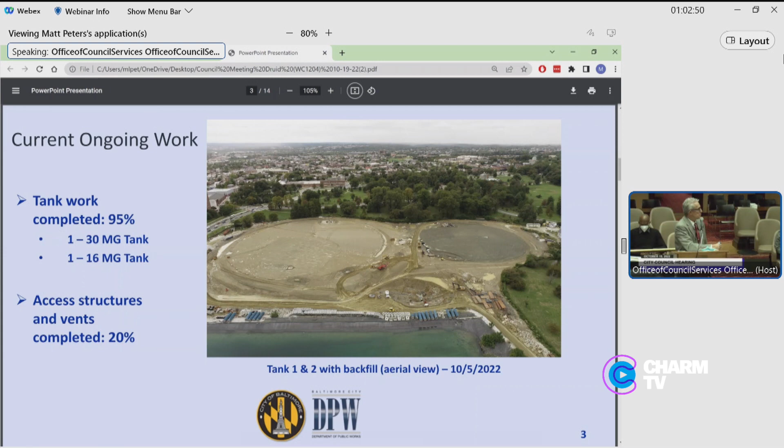Some ongoing work. Again, there's still some pipe work that's going on, which is about 85% done. There's about 6,000 feet of pipeline work, and we're well ahead on that work as well. As you recall, recently we ran into some rock issues and we presented a blasting plan and it was rolled out to the community, and that went well, successful, and we're moving ahead with the pipeline construction. That blasting actually saved us probably a year of time because of the hard rock we encountered. Next.

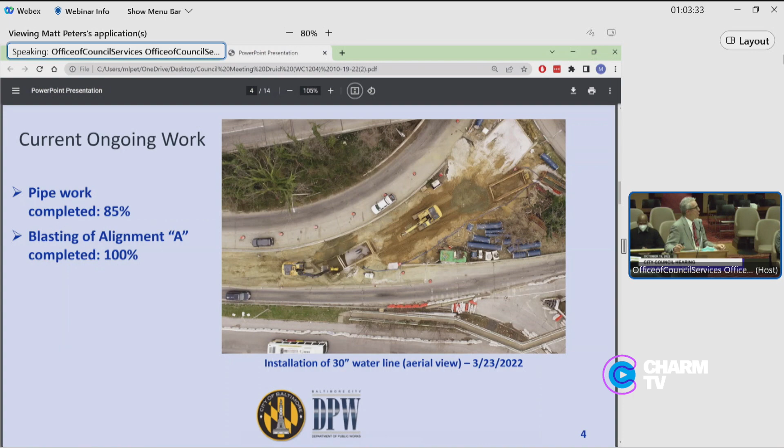And for this picture, you can see on the right, that area right there is what we're referring to as alignment A, where we hit the hard rock. It was about 400 linear feet that we had to work with on the rock, and the blasting was contained to that area, and there were really no impacts resulting from the blasting itself. The work involves installing the large pipeline. You've got to weld the pipe together, a steel pipe, and then also some additional auxiliary pipes, and maintaining erosion and sediment control as well for compliance. Next.

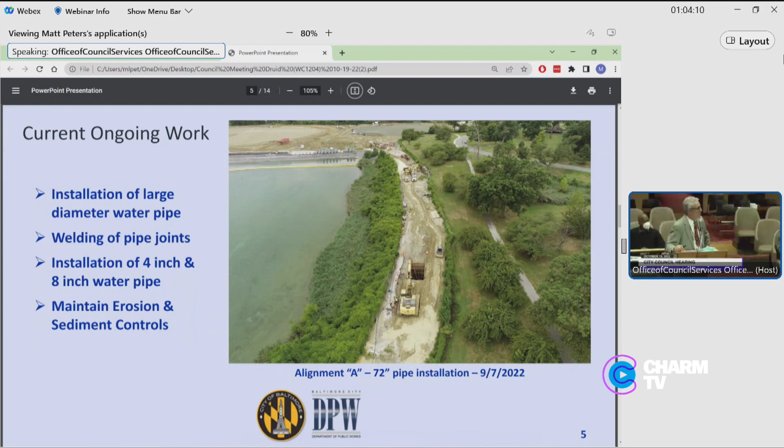So some of the upcoming work at the project: we still have some electrical work to do, instrumentation and control to control levels in the tank and the system, and interact with all our pumping stations and our treatment plants. We continually test pipe once it's installed to make sure the integrity of the pipe is sound.

There's going to be an aeration system installed in the lake itself. Then there'll be tie-ins. We'll reestablish the Jones Falls Trail, and then the restoration and full opening of the Druid Park Lake Drive is estimated the end of this year, December, and we're coordinating with DOT on that reopening.

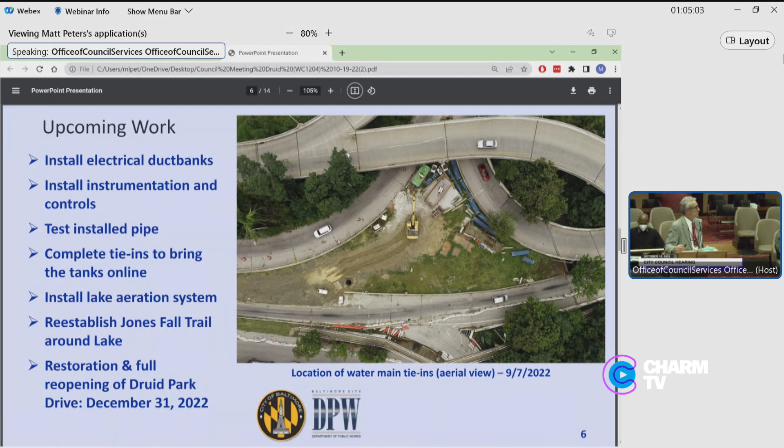Okay, and just wanted to mention briefly, the city's always investing in infrastructure based on a lot of parameters. We look at condition, criticality, equity, and we try to spread investments throughout the city of Baltimore. And some of the investments in this area of the city around Ashburton, there's a couple projects that are ongoing.

There's one, the 1257 water main replacement project just across 83 to the east. It's basically a water main replacement, started in April, expected to finish in September of '24. And then the Vernon Pump Station, which is actually on the east side of 83. We're basically finishing up design. It's planned for construction in the near future. So just wanted to mention the other investments in our infrastructure, specifically in this area.

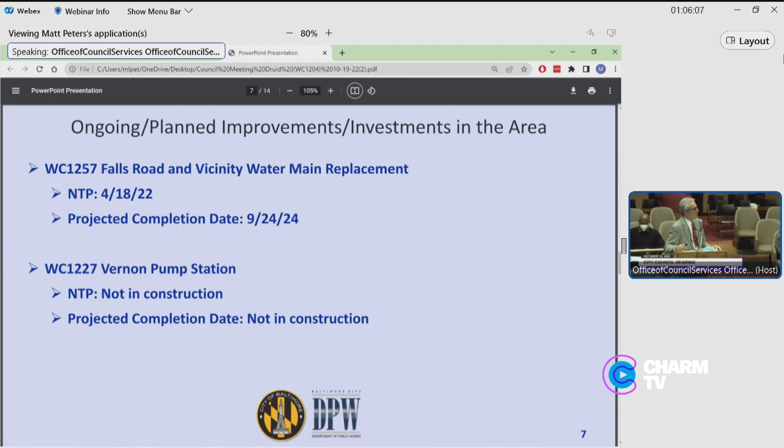And then again, as mentioned earlier, the councilman mentioned investment in this particular park. It's a large park, a lot of activities, and there's a lot of amenities that are going to follow on this park. As you can see here, it's a long list, and I have some slides to show what's proposed, but we're actually reestablishing the shoreline to preserve the aesthetics of the lake. There's going to be an open welcoming area. Actually, the covered tanks will add 14 acres of open space for the park.

And new site lighting, paths around the park for pedestrians and cyclists. Widen some of the Druid Park Lake Drive. There will be a podium for a future band shell, coordinating with Rec and Parks. And we've been coordinating with Rec and Parks continuously, even through construction, on some stormwater features and things of that nature.

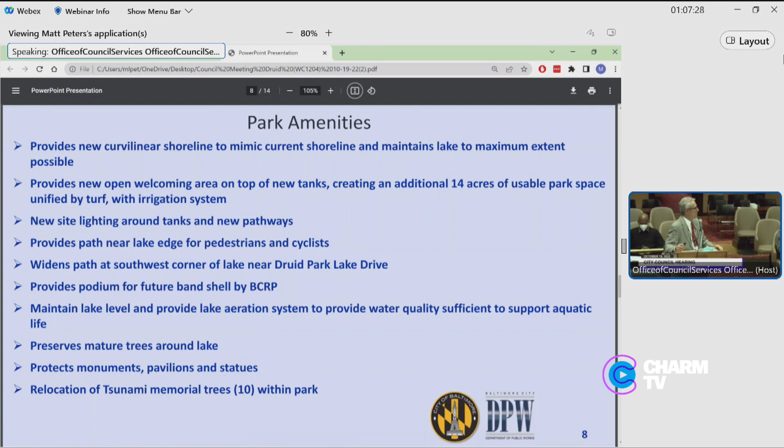Again, the lake's water level will be maintained, basically with stormwater and supplemental water supply. We're going to preserve the trees and monuments as well. Next, please. So, again, I just wanted to give a bit of an overview. This is what the finished product's going to look like. You can see here that the tanks will be covered, and there'll be open space for activities, utilized for multiple events. Next.

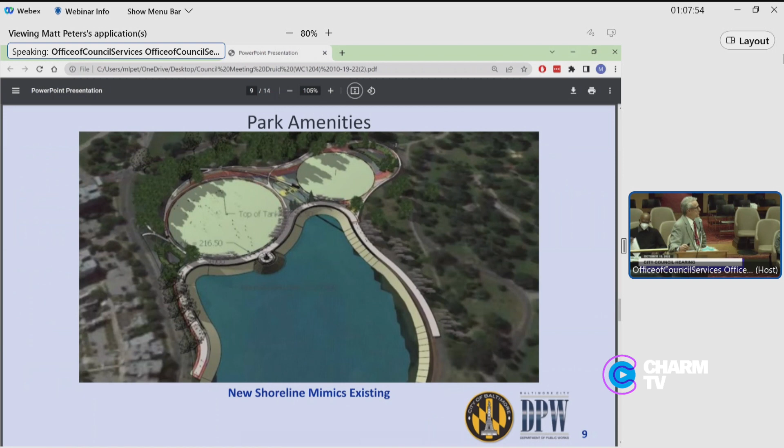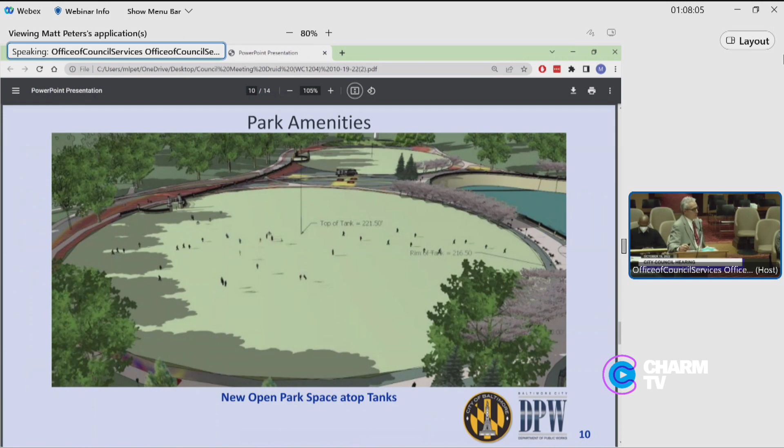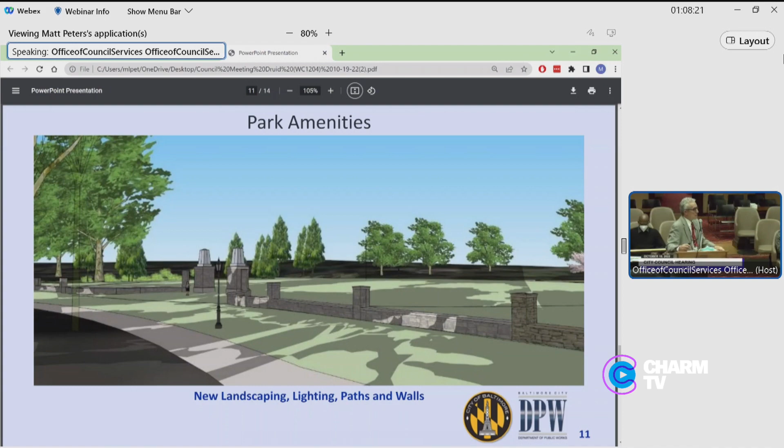Again, a little closer shot to give you a sense of the magnitude of the open space, and you can see some of the paths around to the right. There'll be more of an entrance on the left side of the park. Next, please. And this is the park entrance area, to give a gateway into the park, memorialized with stone walls, sidewalks, paths, and lighting. Next.

And again, coordination with Rec and Parks and the vision for the park. We're constantly coordinating and making sure that we're working with Rec and Parks on key features, be it the pavilion, amphitheater, trails. As I mentioned before, we're coordinating right now on some stormwater that Rec and Parks is proposing in their next phase. Our work is not impacting the existing park. And like I said, we're coordinating with Rec and Parks facilities. Next.

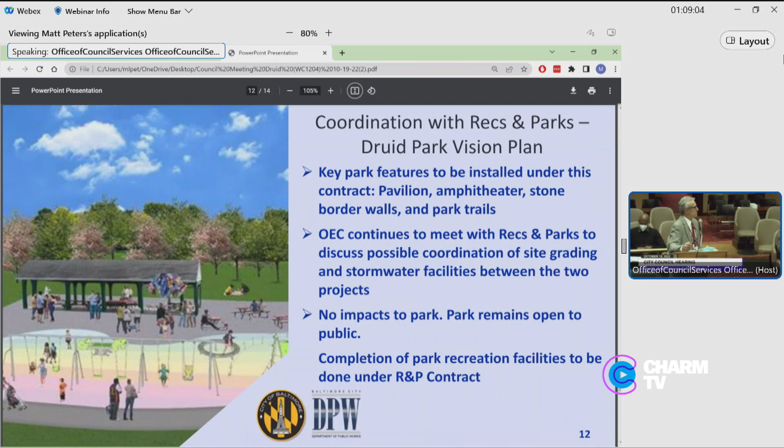I just wanted to touch briefly on some environmental concerns that we came across during the construction of the project. Initially, back in 2017, as you're aware, the tanks are actually sitting in a portion of the footprint of the lake, so we had to isolate that portion. When the contractor started, they put in a turbidity curtain in 2017, and then they would build a cofferdam to separate the active potable water lake from the area where the tanks were to go.

There were significant efforts to maintain proper construction with the turbidity curtain. We had some issues with that. We worked with MDE, and there were multiple attempts to get the turbidity curtain up to standard to meet water quality for the water system, and that was not successful. So basically what we did is we took the lake offline, drained it, installed the cofferdam, and then we were able to continue on with the construction.

We continuously coordinated with MDE to ensure we're in compliance with water quality regulations. As far as water quality testing in the lake, the contractor was testing daily chlorine, turbidity, temperature, pH, and weekly E. coli. So we're ensuring the water quality of the lake is maintained for the citizens of Baltimore. Next.

The Druid Lake Vision Plan was something that we began in the year 2020. We finally published our report in November of 2021. I have it here in front of me. This is a 115-page document that covers a lot of material. So to get to that point, we had to first step back and look at the history. Druid Hill Park is the third oldest park in our nation. And I don't think any of us should take lightly the importance and the significance of this property.

The history within the city comes from the terminology of the druids and the trees in the park. We saw in the early 40s and 50s a lot of use from the surrounding neighborhoods and communities that were primarily African American and Jewish neighborhoods. Then in the 1960s, we saw these neighborhoods unjustly cut off from the park with the Jones Falls Expressway and Druid Park Lake Drive. These are some issues that we really see as important in tackling and addressing.

Looking at a greater context of our project, of course, this is building upon the DPW tank project, which I think he showed at $134 million. We envision the lake project, the recreational lake opportunity, in the $50 to $60 million range, and then opportunities to address those issues with Druid Park Lake Drive on top of that.

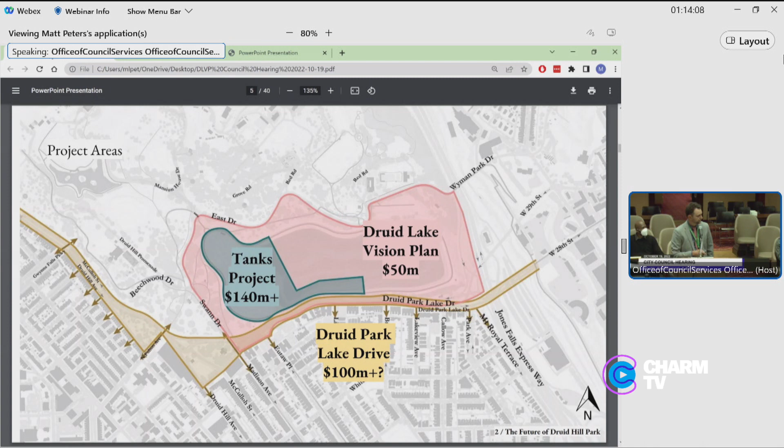In terms of working with our colleagues, I think this project, more than any other one that I've been involved with, has really broken down the silos. Working closely with DPW, DOT, and the Department of Planning, we've really come together to create a lot of energy, not only around this project, but others in the vicinity. Of course, we have great proximity to the West Impact Investment Area and all the other development that's happening in this region, so that our project can potentially be a really transformative effort that can build upon all those efforts and make a really successful project.

So as part of this effort, we've really been thoughtful in our engagement. We've had 3 community engagement meetings hosted virtually. We had 1 in person. We've had numerous interagency and director level meetings, meeting with the state as well. Through all this, we've engaged with over 600 residents, not only directly around the park, but throughout the city. We see this as not only a local, but also a regional destination. Of course, people come here not only to bike and walk around the park, but to use various amenities, to attend concerts and different things that are held throughout the year.

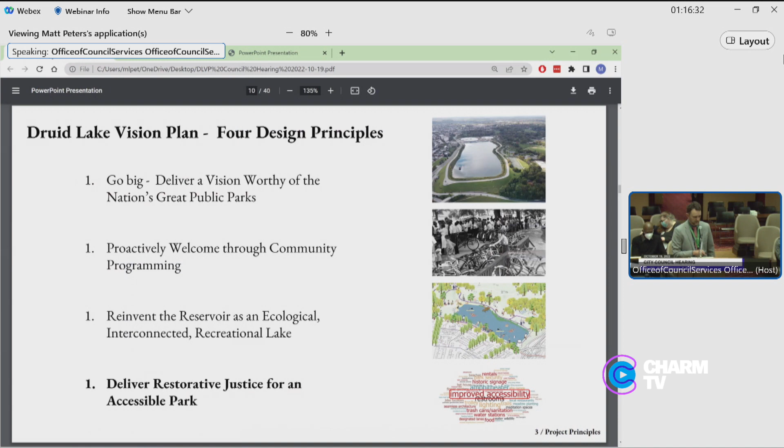So through that, we've had a lot of community engagement, as I mentioned. We're looking at ways to address the ecology, and then last but not least, address some of those racial injustices that were part of the Druid Park Lake Drive and the JFX that cut off our surrounding neighbors.

So here's a quick shot at the vision plan. This is still a work in progress. We're currently in our schematic design phase. We're continuing to roll. We intend to come back to the community sometime in early 2023 and show our progress.

By this point, we've taken this vision, and now we're getting into the nitty-gritty engineering of it to see what our limitations are, what can and cannot be done with regards to the dam, how we make sure that we respect the work that DPW has done while building upon our opportunities to get people down to the lake and all around it.

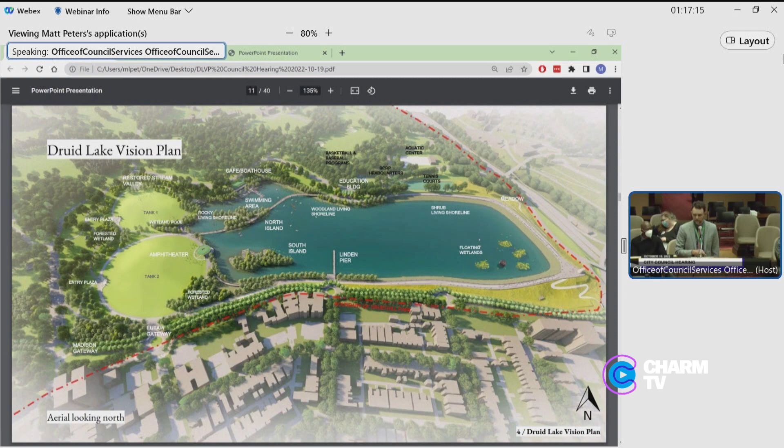So I'll give you a couple shots. This is a picture today looking northwest. And then this corner is where we envision an opportunity for a boathouse and a cafe overlooking the water. We can potentially have some islands and a pedestrian bridge and really get people not only in, around, but over top the water and experiencing the lake in ways that they previously did not have access to.

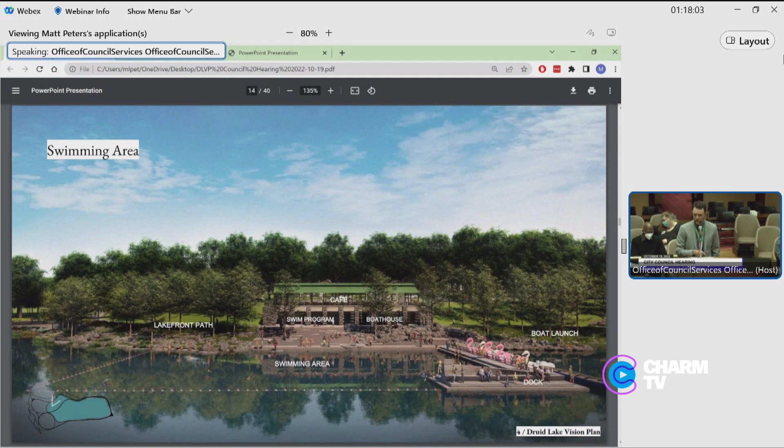There's another shot at that potential boathouse. Again, this is very conceptual and it'll be fleshed out going forward. But I mentioned the idea of a cafe. Maybe it's an opportunity for vendor stalls, a place where local businesses can come in and set up shop and serve the people. We don't really have this in our parks at this point, but this is an opportunity to get people to come to the park and spend an entire day there.

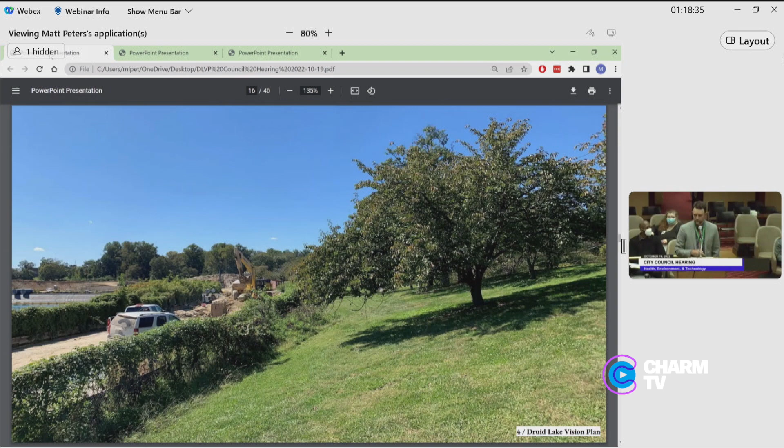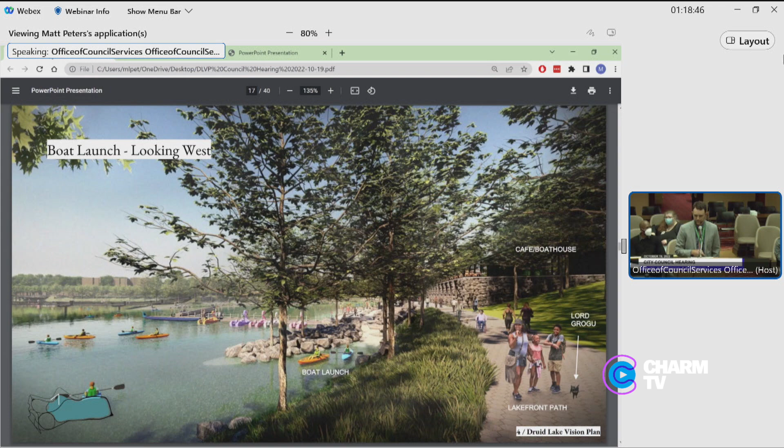Another existing view. And again, you can see the boat launch here, getting people down to the water. This will be an early phase plan of ours, really creating that access.

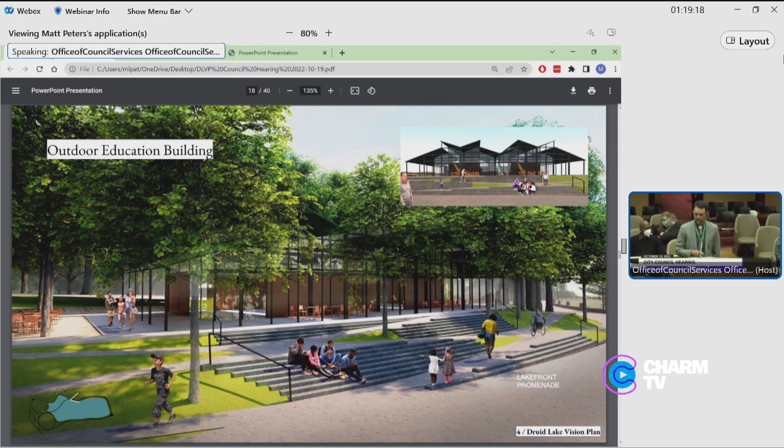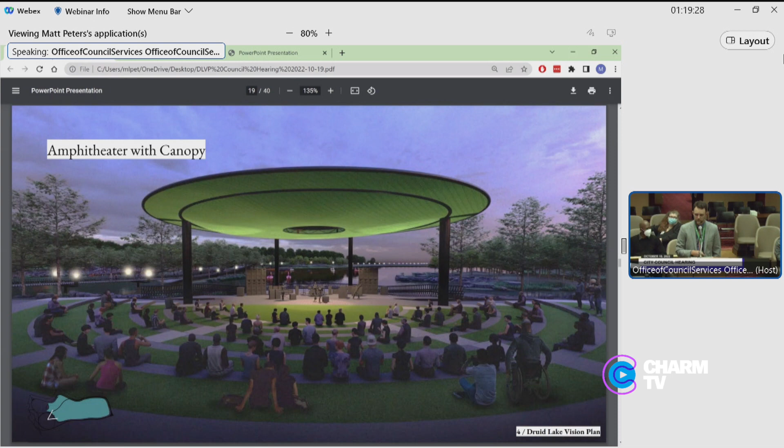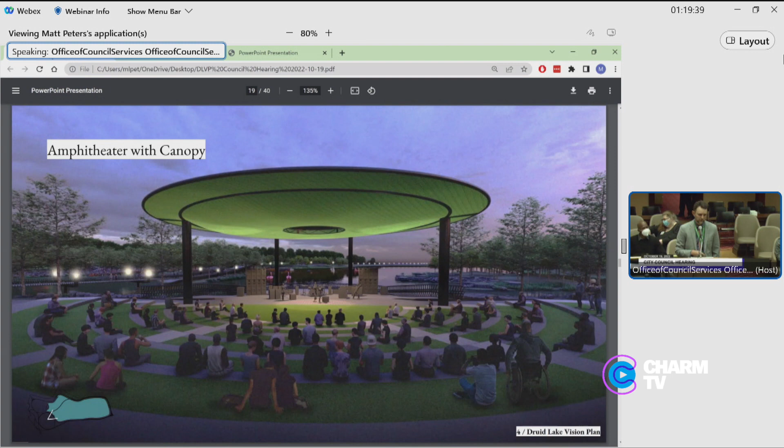And of course, there was mention of the 14 acres on top of the existing tanks. We're looking at opportunities for an amphitheater, different ideas as to small events and large events. In reality, we can support AFRAM here. We can hold over 100,000 people on these tanks.

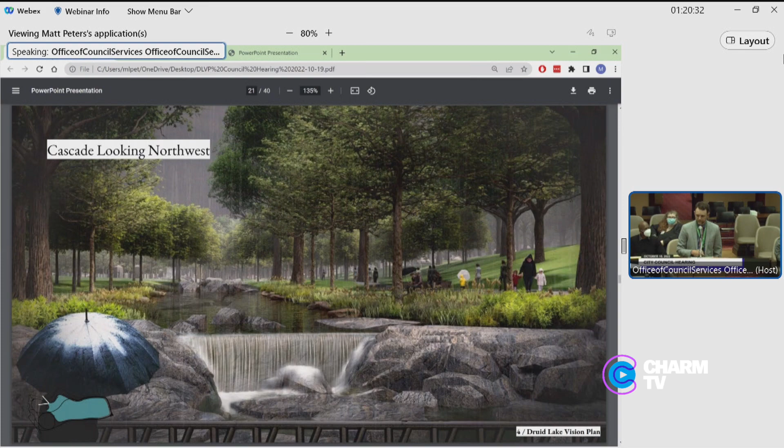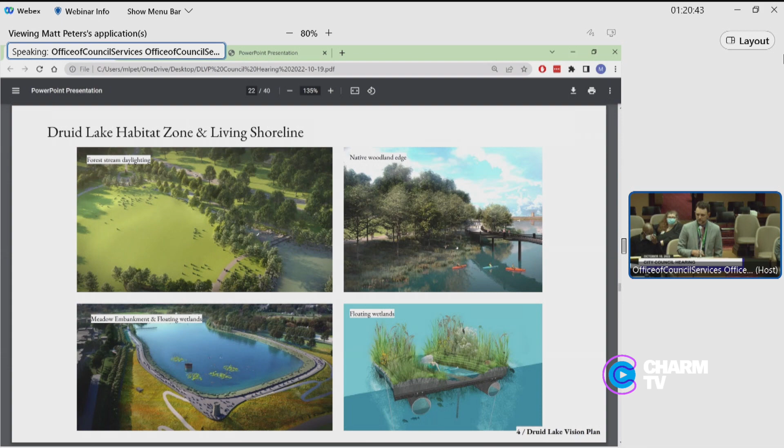This is kind of a look at that. This is daylighting some of those streams that come down from the zoo, from the boat lake they have there. So this is something that would bring that existing biology to our lake and serve as an interesting component. A couple other items here. We look at potential for floating wetlands and living shorelines. Here's a little screenshot of what that could be.

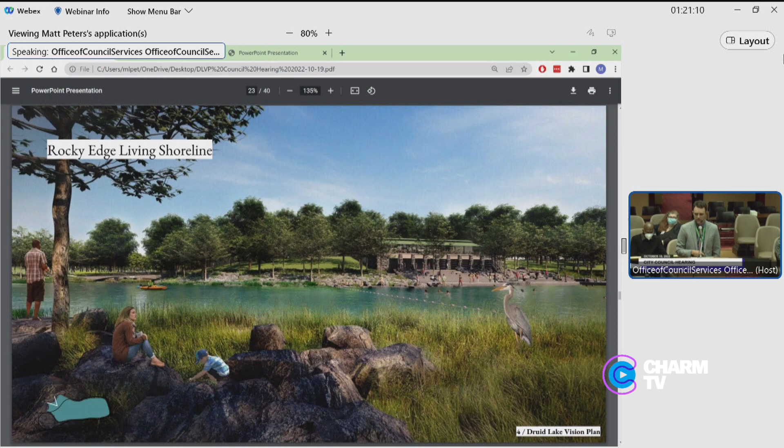The possibilities are endless, and for me, I did not originally think of this project as an environmental justice kind of thing, but it's really an opportunity to create life in many ways, and it's something that is very exciting for all of us, and certainly for the engineers. So understanding that it is going to take time. It does not happen overnight. So as time goes on, as we slowly introduce new species, the flora and fauna will find itself and become its own habitat.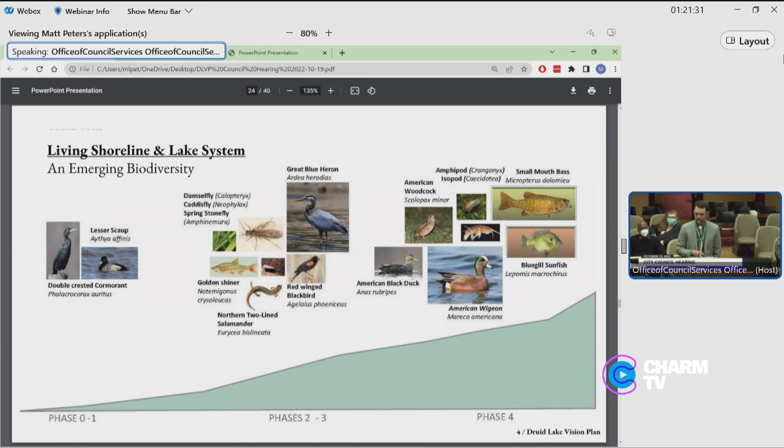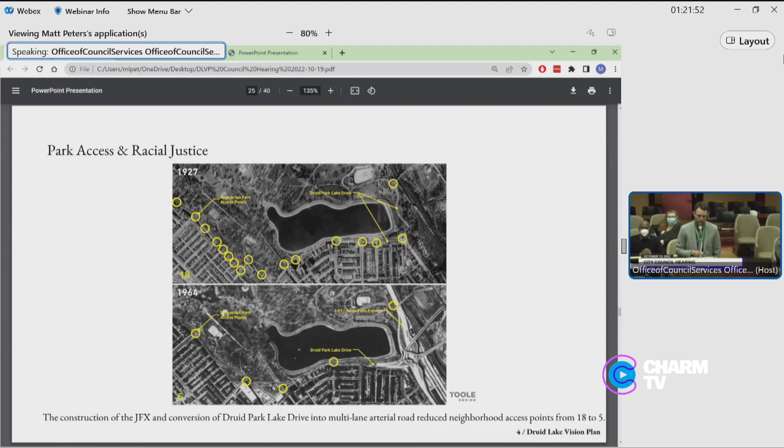I touched on the travesty, if you will, that is the Druid Park Lake Drive. You see this historical document here, this photo showing 18 different pedestrian connections into the park along the southern edge. We currently have 5. That's an issue that we need to address, something that we've been talking very closely about with our colleagues at DOT.

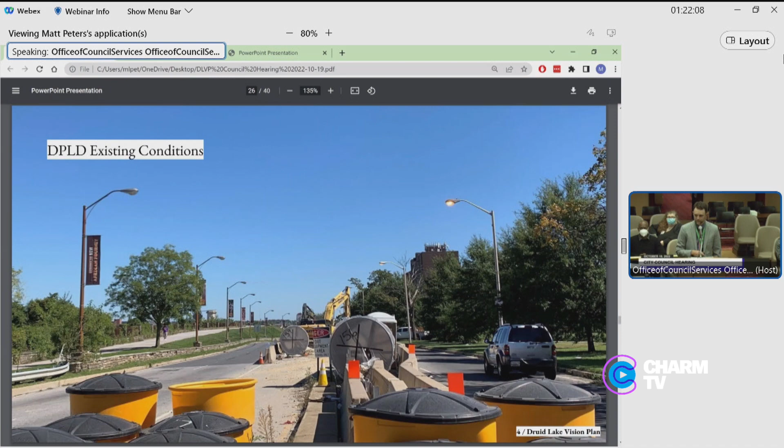We see this as an opportunity to take this high-speed thoroughfare and restore it as a parkway. 1 lane each direction, pedestrian walks on all sides, a hierarchy of paths for both slower moving folks and people on bicycles.

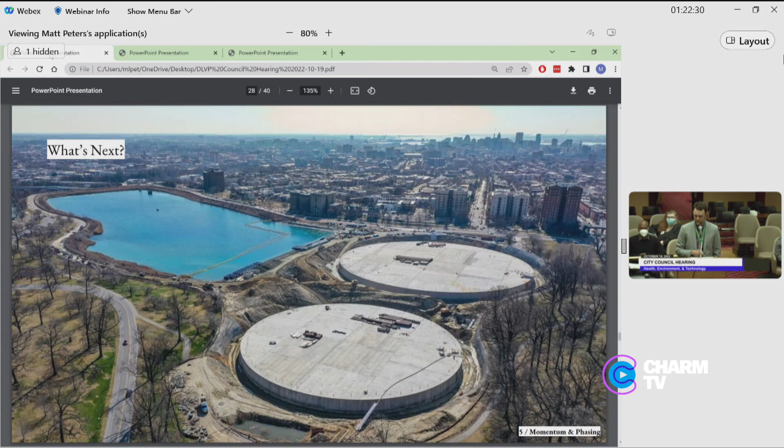Another look at the currently existing project, and then what it could be, or what it will be. We're going to have to do this in phases. I've mentioned it's proposed to cost somewhere around $50 to $60 million. First and foremost, we need to address the circulation. We need to get people back moving in and around the lake.

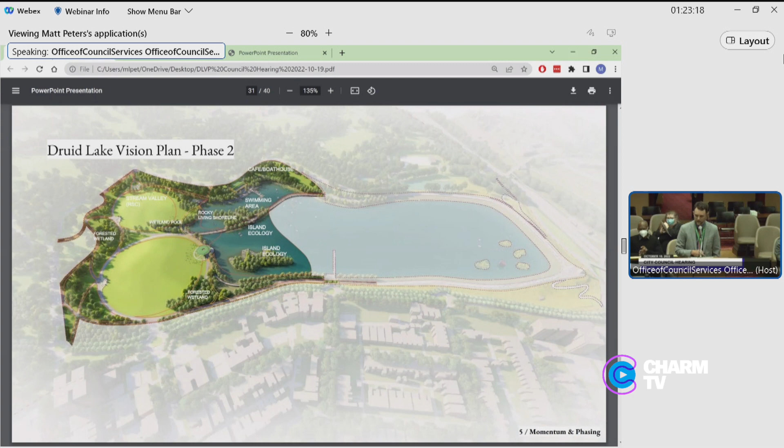Beyond that, there's a lot more environmental opportunities, creating these islands and these bridges, and of course the boathouse. I'm optimistic that we may be able to combine phase 1 and 2 based on funding. We currently have $17 million. If we're able to get in the $30 to $40 million range, then we could probably achieve both phase 1 and 2.

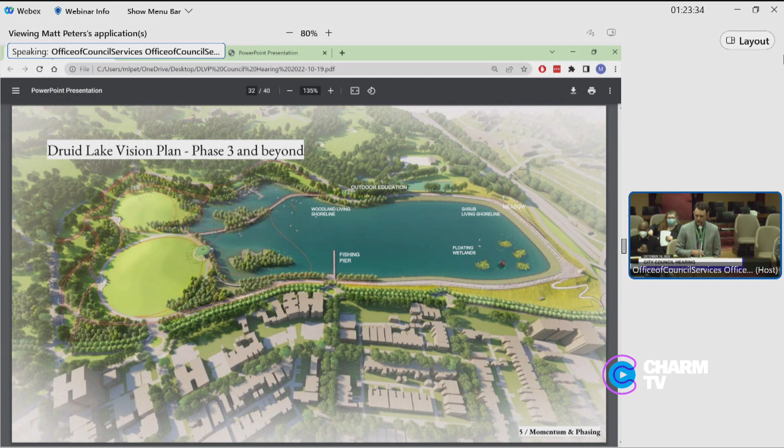I mentioned we got $17 million from session last year. We've made a request to double that this upcoming session. And I know Councilman Torrence has greater ambition beyond that. So I'm feeling pretty positive and optimistic of where the capital is going. And I think that this may come to life.

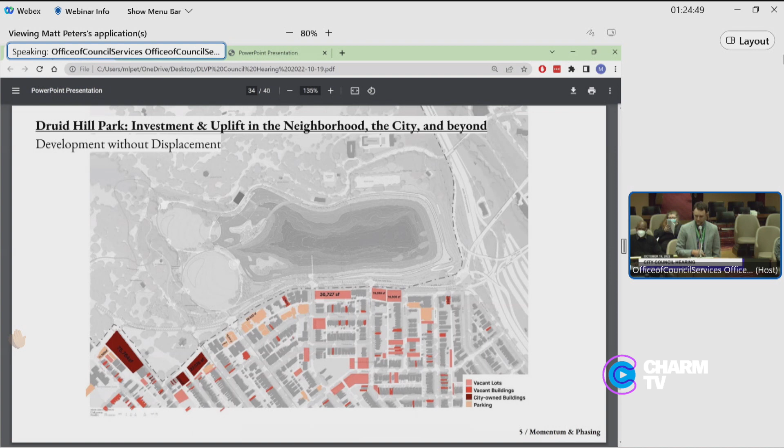Looking around us, we need to be cognizant of our surrounding neighborhood. There are some vacancies, there's some open lots. There are some residents that we need to make sure that we don't displace through our efforts here. So this is a transformative project. It's an opportunity for development, but we can't forget about the folks that we're trying to serve locally.

So again, I showed this. We're all working together very closely within the agencies, but there's also outreach to both the state, private levels, and even at the federal level, there are opportunities. This is where we're talking closely with our colleagues at DOT about infrastructure opportunities. I believe they intend to apply for a federal grant relative to Druid Park Lake Drive in the next year or two. That's something I continue to advocate for. We feel that our project is really only a true success if we break down those barriers and allow people to get into the park.

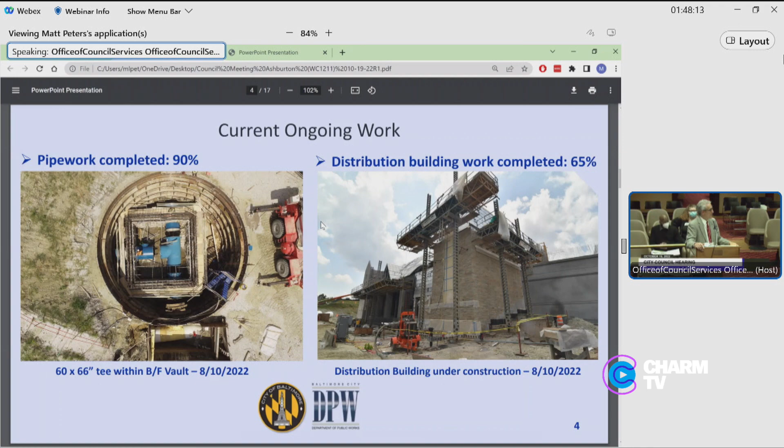Again, here's a better shot of the distribution building. It's going up. Actually, during all the construction, we maintain the sediment erosion control. And there's a lot of pieces that go into these types of projects, commissioning, and as well the startup. So all that's ongoing. In this picture here, you can see this was actually about a month ago. So definitely moving along with the work. Next.

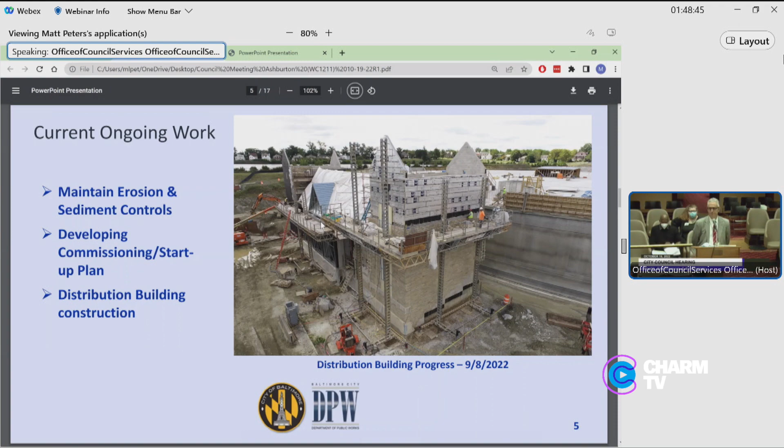Again, I wanted to just emphasize the investment into the city of Baltimore across the city. As we evaluate and improve our assets, there's multiple factors that are going into replacing, upgrading, and improving our infrastructure. We look at condition and criticality, equity. All these things are put into the picture as far as selecting projects.

And some of the projects that are in this area, as you can see here, there's a little bit to the south, there's a large water main project that's ongoing down on Ellamont and Springlake Way that just started in June, and the completion's May of '25.

A large interceptor sewer project that was part of a consent decree. It was kind of an early start for a phase 2, a large project that went right through the area, right kind of through the east of the tank site. That actually started in 2019, and we just reached substantial completion. The project is actually flowing, and we're just doing cleanup and punch list items, so hopefully we get out of there pretty soon.

Then some upcoming projects. The Ashburton Washwater Lake is going to be dredged, and we're projecting in 2023. That's a lake that's just east of the tanks, and they take basically backwash water from the water filtration process, and it has to be dredged every so many years to ensure we have the volume as well.

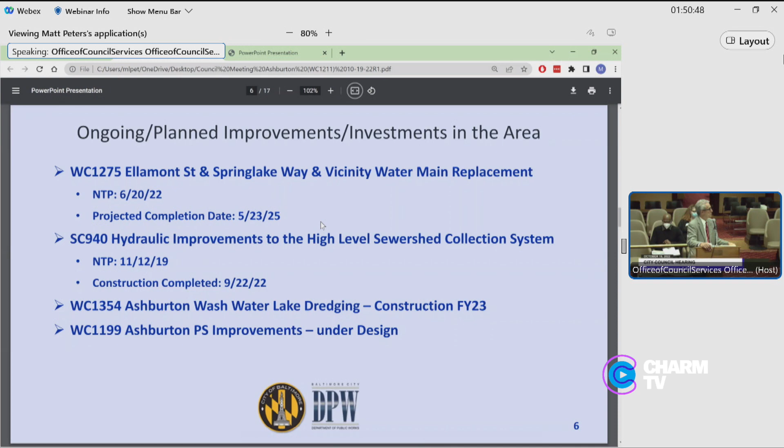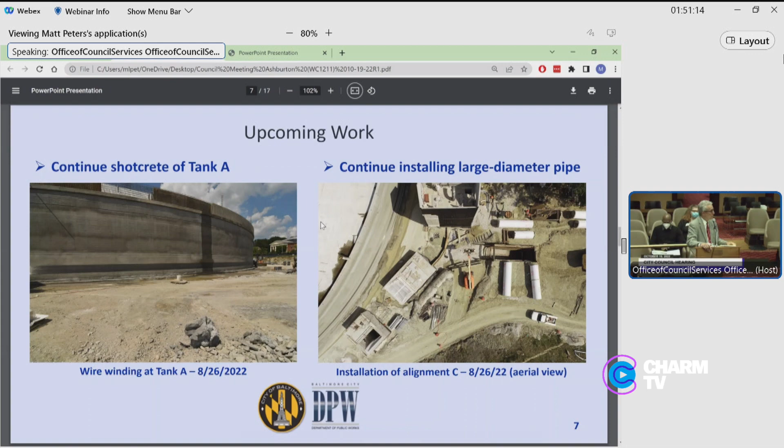And again, just to get into specifics a little bit, as I mentioned, the tanks themselves, they're up. You can see they're basically concrete reinforced tanks. And then these tanks are actually wrapped with wire to improve the structural integrity of the tank. So that's going on right now. And then there's still some large diameter pipe installation that's remaining. Not too much, but a little bit. Next.

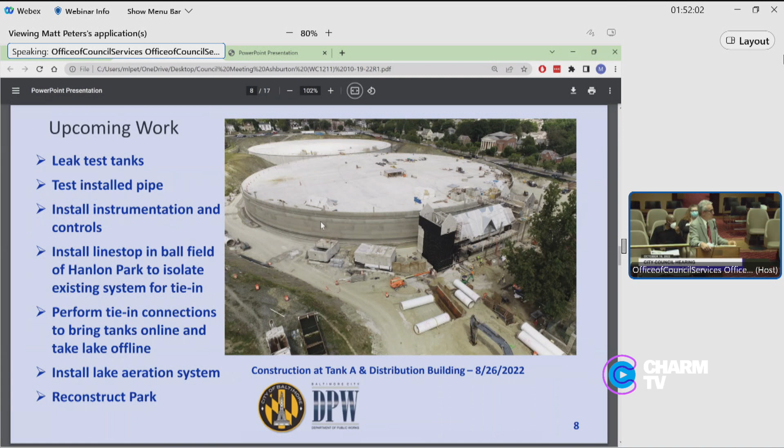And then there's tie-ins as well, and ongoing other installations. So basically, a lot of the heavy work is done. It's more of the site work, pipeline work, and some instrumentation and controls. Next.

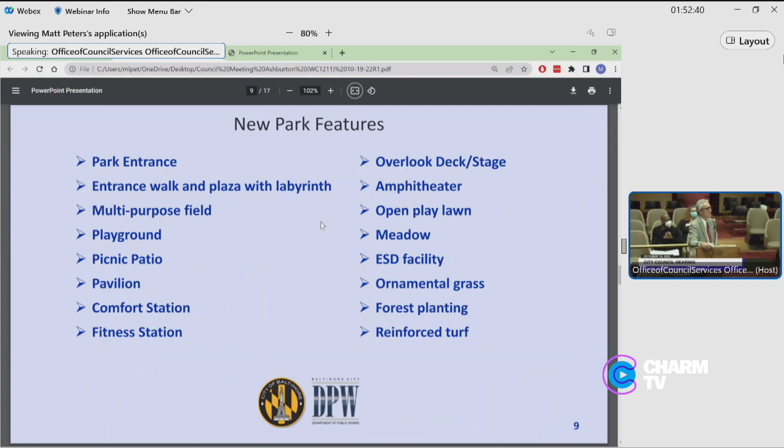And then I wanted to kind of move towards the park features. Again, we work closely with the community, realizing that it was a park amenity. There's a lot of features that are going to go in after the project's completed as far as amenities for the park area. There's entrances, walkways, fields, picnic areas, comfort stations, fitness stations, and overlook amphitheaters. And then also forest planting, ornamental grass. So I wanted to go through a couple of slides that show you what we're proposing. Next.

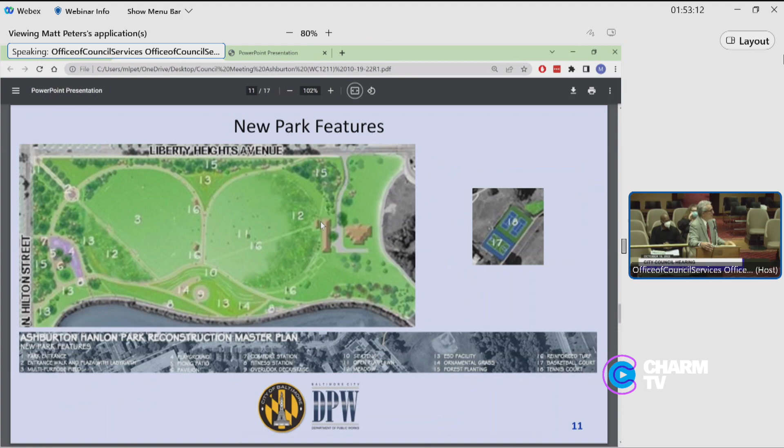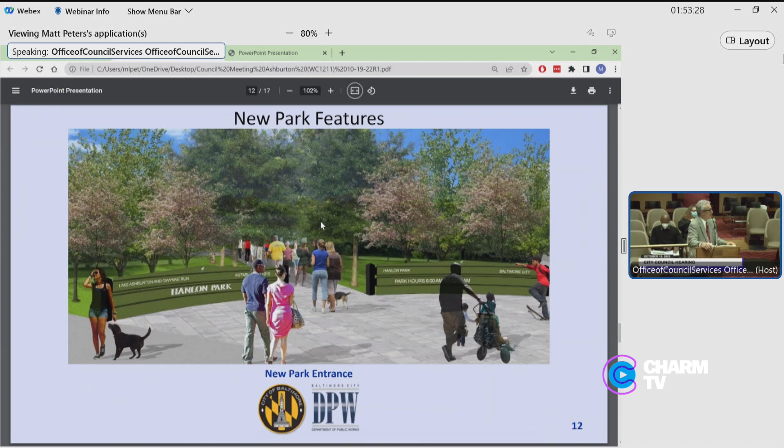Again, like I said, on the northwestern quarter, this is kind of the gateway, the entrance to the park. As you can see here, there will be a memorialized entrance for pedestrians. Next. And then, like I said, playgrounds, equipment for playground activities, and pavilions as well. Next.

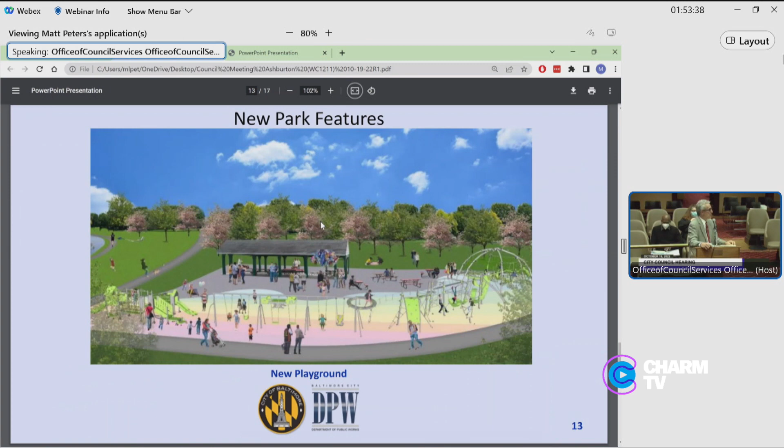And again, right up against the lake, there'll be basically a sitting area and ornamental grass, walking paths as well. So again, to accommodate the residents in the area as well as the community as far as park amenities. Next.

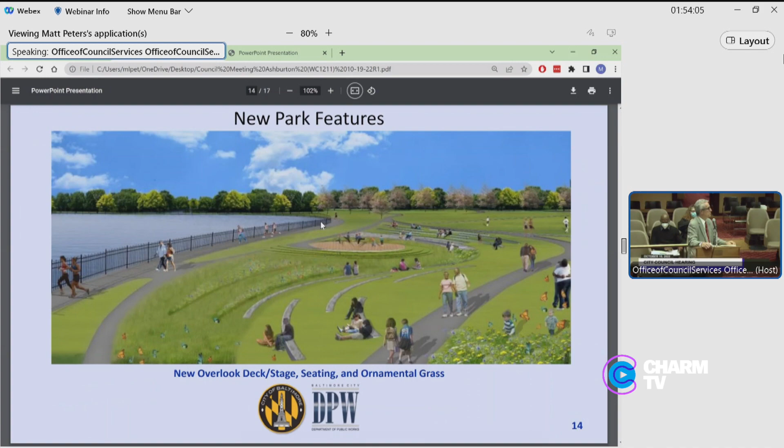And again, the community involvement with the playground and fitness equipment. We have sent a color selection to the community and have requested some feedback. We're hoping to get some feedback from the community over the next couple of weeks with color selection so we can move forward with procuring the equipment and stay on schedule. We can follow up if necessary, but that's been submitted to the community.

As well, the community has been invited to a site visit, and we look to hear from you so we can walk the site and show you what's going on at the project as well. Next.

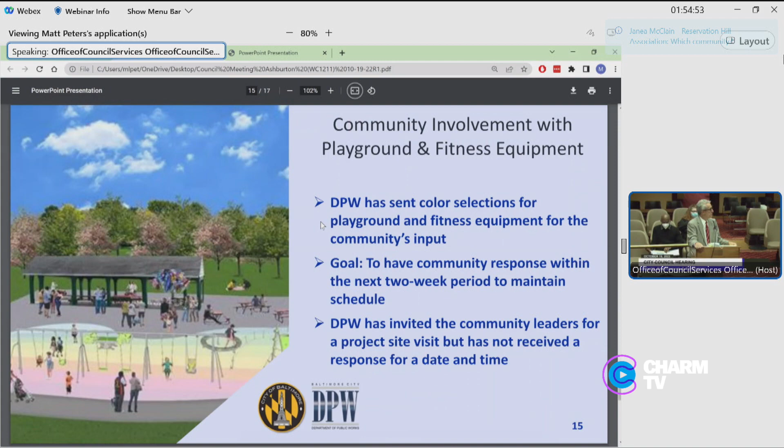I wanted to talk a little bit about the environmental impacts we had in the area. As you know, the hexavalent chromium was discovered during excavation for this large project, quite a bit of excavation to install the tanks. Once it was identified that the chromium was present, the project was stopped for a period of time. You can see 57 days, and we took samples and worked with MDE and the regulators and looked at the MDE standards of 23 parts per million.

And the MDE standards are actually 10 times more stringent than EPA's. What it is, MDE allows 1/10 of the allowable risk of exposure to this type of element, chromium. So we actually took the more stringent standards and complied with those.

What we ended up doing is having the contractor dispose of all soils on site that were over 9.5 parts per million. So all that material was taken off site, disposed of off site and purchased by numerous companies and not brought back on the site. You could see them there. So again, DPW worked closely to ensure that that was handled in the way that we felt was best for the community and in a successful project.

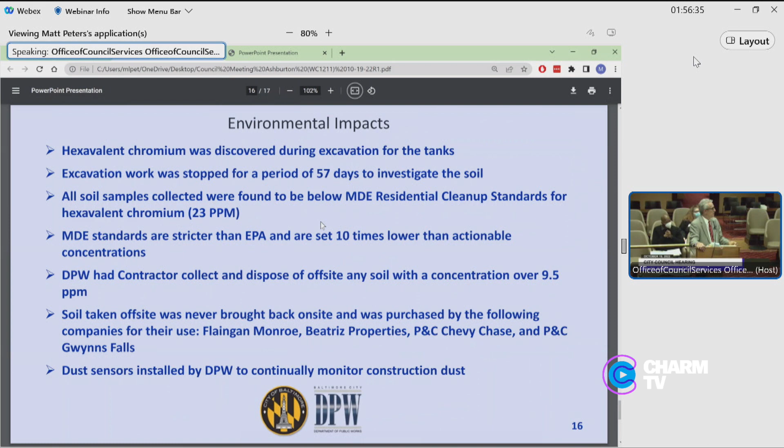And we also continually monitor dust control on site to ensure there's no high levels of dust, and that's monitored regularly as well. Next.

So with that, I think that's it. I don't think there's any more slides. Okay. Well, thank you very much. That gives an overall presentation of the project, where we are, and thank you.

Okay, we're going to go back into questions specifically about Ashburton, and also some general questions about both projects that we still need to address. The first thing that I want to talk about is the park. Right now, we're at a time within our city where we are addressing ADA compliance concerns and constantly speaking about ensuring equitable access to multiple spaces, including green spaces.